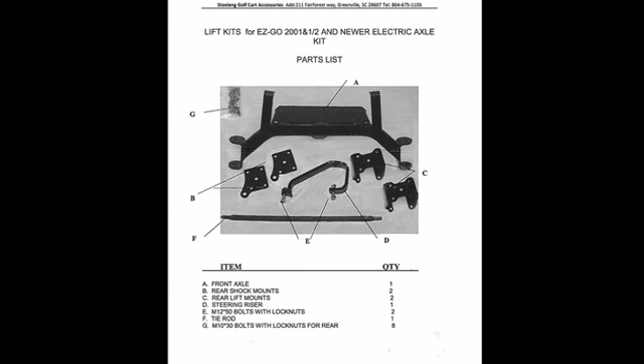Your kit will arrive all together, containing everything you need to get your cart lifted and styling around your neighborhood in no time. We recommend that you check all the components carefully according to the supplied parts list, ensuring everything is there and nothing is damaged.

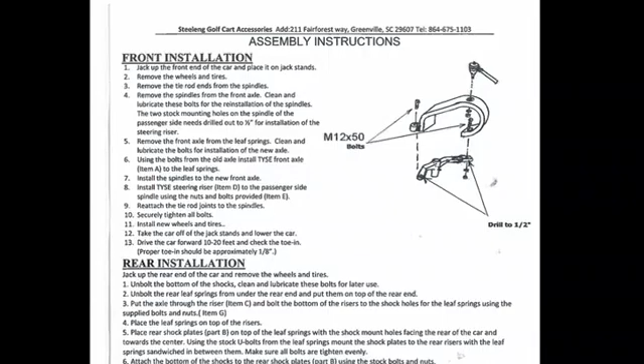You will also find assembly instructions enclosed with your new lift kit, and for most of you, I know that's all you need. But for me, I'm kind of a visual guy, and I do appreciate being able to learn from watching somebody else do it. So I'm hoping this video demonstration will assist you with your Steeleng lift kit installation.

Before we get started, I just want to remind everyone to please practice safety first. Got to have the right attitude. Wear the proper personal protective equipment, whatever that may be. Pay attention to pinch points, line of fire, and for God's sakes, protect your eyes and protect your hands.

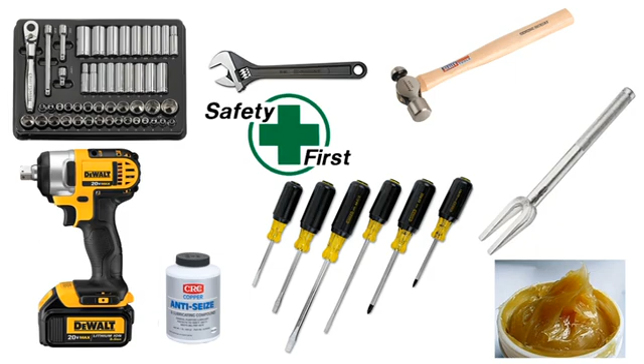You will need some basic tools for this project: a 3/8 drive socket ratchet set, a crescent wrench for backup, hammer, some screwdrivers, and a ball joint extractor which is really nice but not mandatory. You'll need some grease, anti-seize, and if you don't have anti-seize you can use the grease. An impact wrench always makes everything go faster. And remember, safety first.

Okay, let's go ahead and get started using the assembly instructions. We will first be performing the front installation.

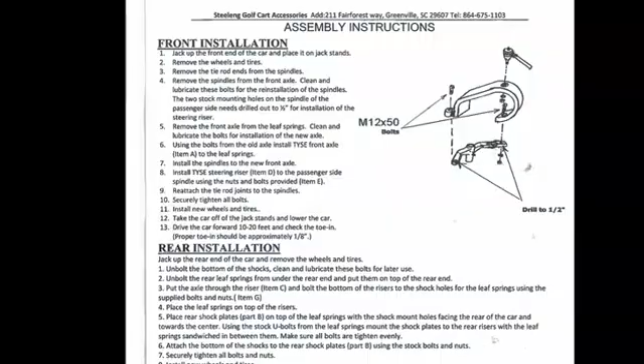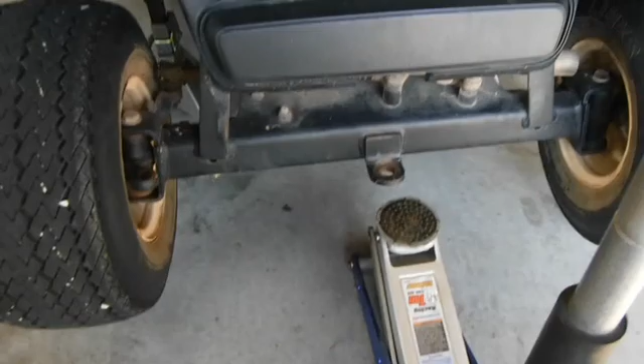One thing I didn't mention for needed tools is a way to lift your cart as well as support it. Once the cart is lifted, support it using jack stands, or your preference, on the first cross rib located just behind the front wheels.

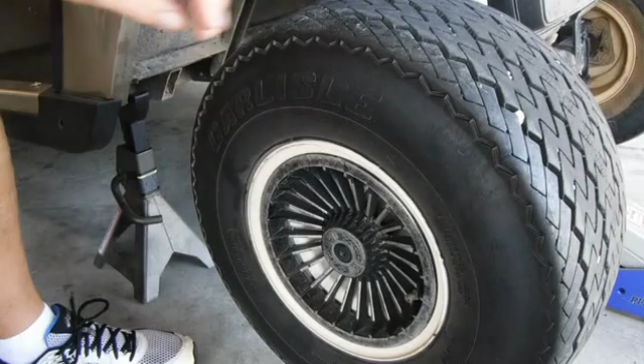Remove the wheel coverings using a flathead screwdriver, then remove both front wheels.

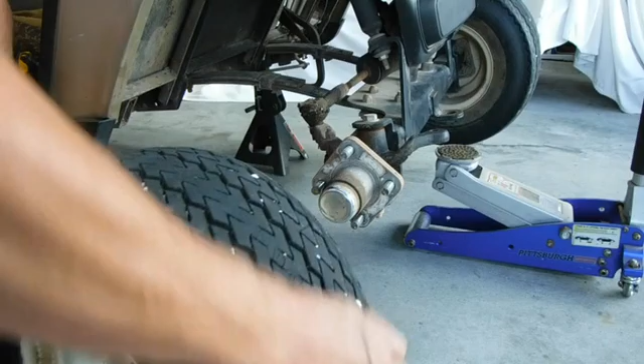Next, we're going to remove the tie rod ends from the wheel spindles. For the tie rod end and the ball joint on the driver's side, the left side of the cart, I left the ball joint attached to the spindle, which I'll explain later.

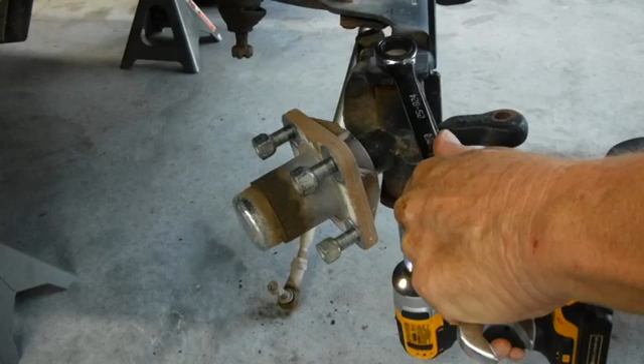Now we can remove both wheel spindles, clean and lubricate the bolts for reassembly. My cart is a 2006, and I found the front right passenger side spindle bolt to be excessively rusted and worn. Also pay close attention to the bronze base wear washer on the top of each spindle bushing, so it doesn't get set aside or lost.

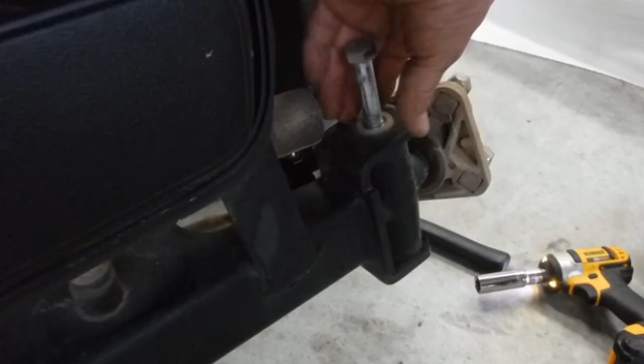I replaced both spindle bolts with 1/2-inch stainless steel bolts bought from a local hardware store, and yours may be perfectly fine and reusable, and I would encourage you to do just that if they are.

Next, remove the lower nuts and bushings from the front shocks where they attach to the front carriage.

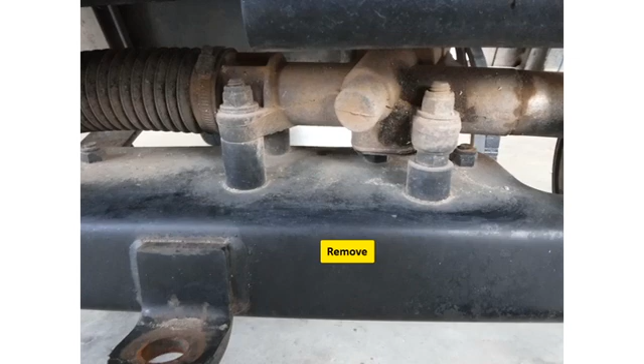Remove the 3 support bolts for the steering chamber. We're going to lay the chamber on the back of the leaf springs. The front right support bolt is also part of the front support plate for the leaf spring.

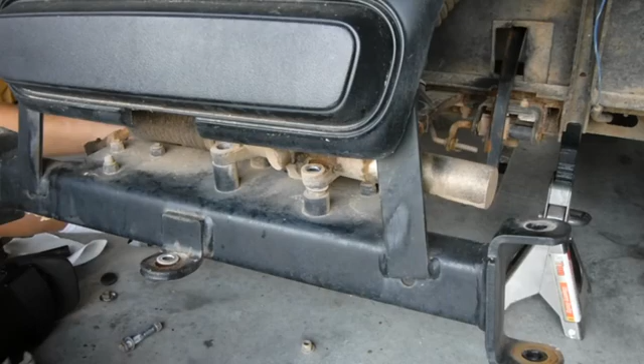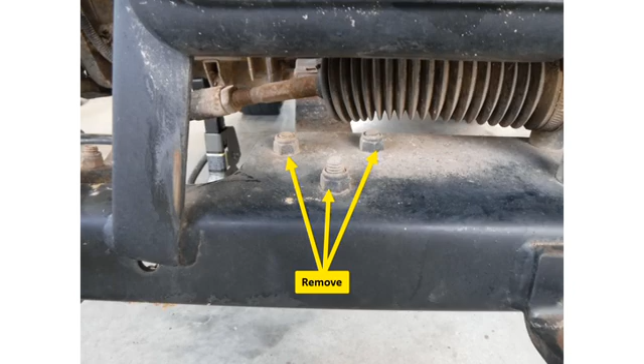Next, remove the 3 bolts holding each of the support plates securing the front leaf springs, allowing the original front carriage to be removed and set aside.

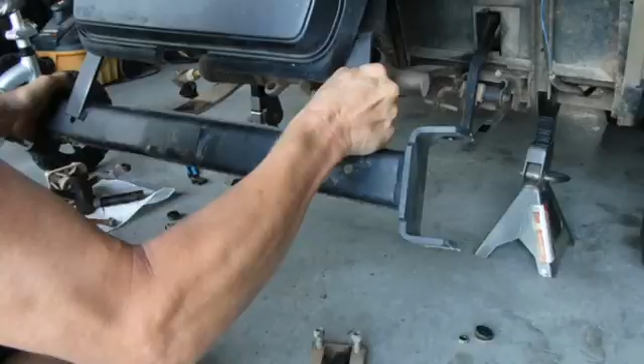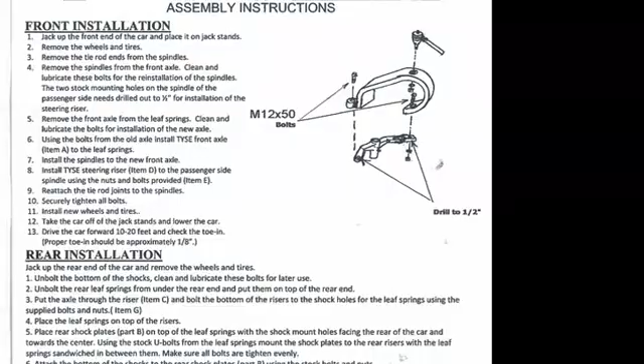The right front wheel spindle requires alterations to the original ball joint support holes. Both holes will need to be drilled out to 1/2 inch for installation of the new steering riser. The original ball joint holes are on a taper, so I would recommend drilling from the small side of the taper hole.

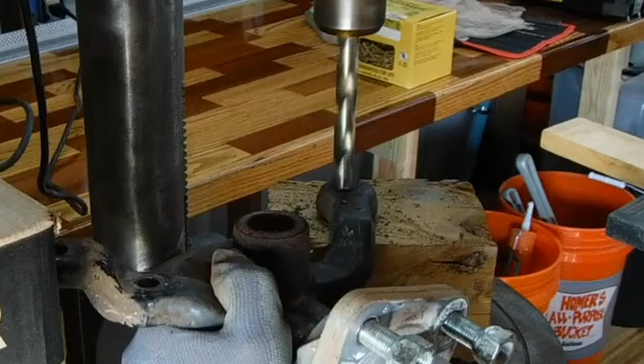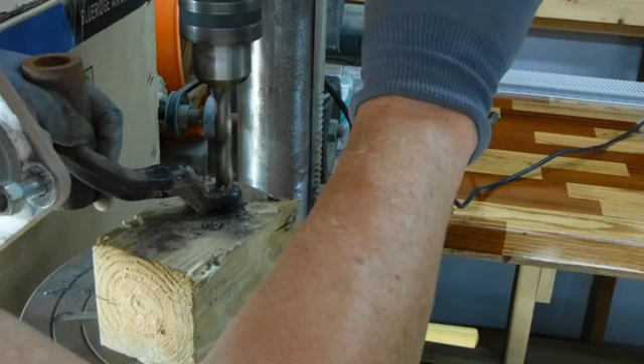Now you can see I used a drill press to perform this activity, but as long as safety is the key factor in the process, a hand drill could be used as well, as long as you have a way to securely hold it.

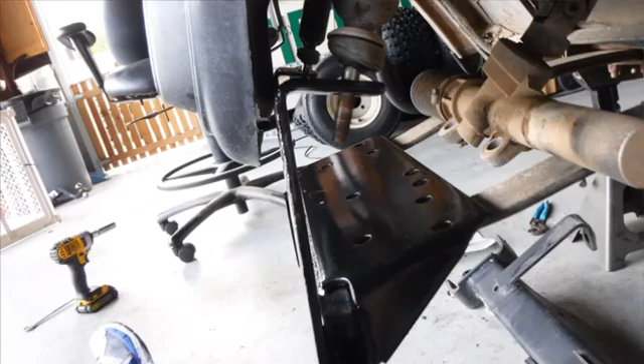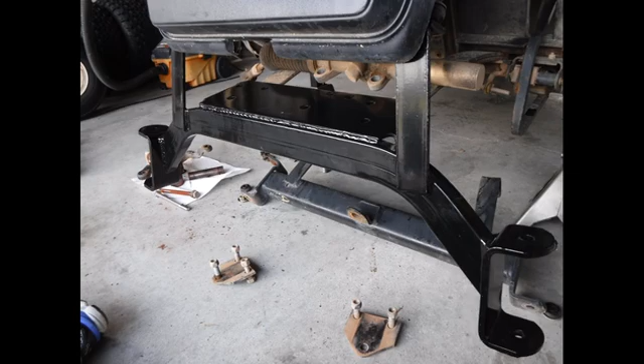Now it's assembly time for the front, and we can place what they call the new axle or carriage up on the shock stems and on top of the leaf springs. Now we're going to mount the triangular support plates underneath, securing the carriage to the front leaf springs. Remember to use anti-seize if you have some, grease if not.

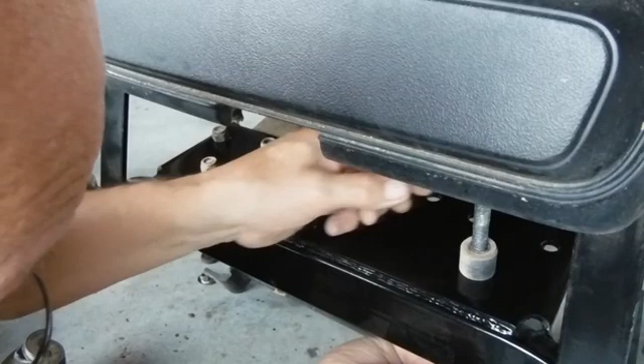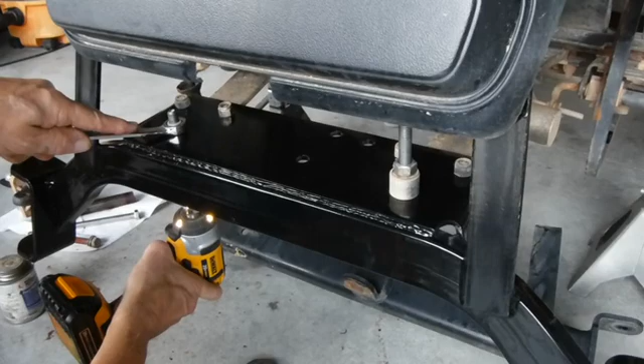Secure a bolt on each side while holding the carriage in place. All 6 bolts can now be properly tightened. Replace the nuts, washers, and bushings on the shocks and tighten accordingly.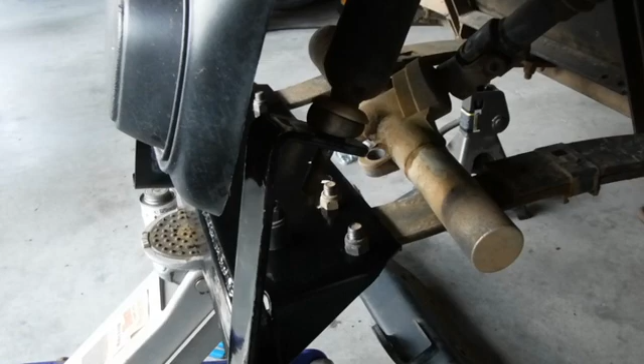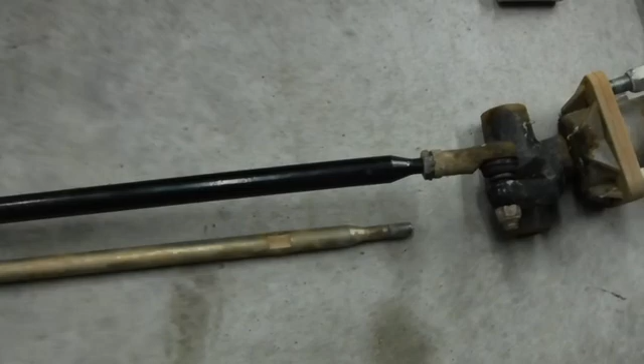Replace the steering chamber. Earlier in the video I mentioned that I did not remove the steering rod ball joint from the left driver's side spindle. Instead, I removed the old rod and replaced it with the new steering rod.

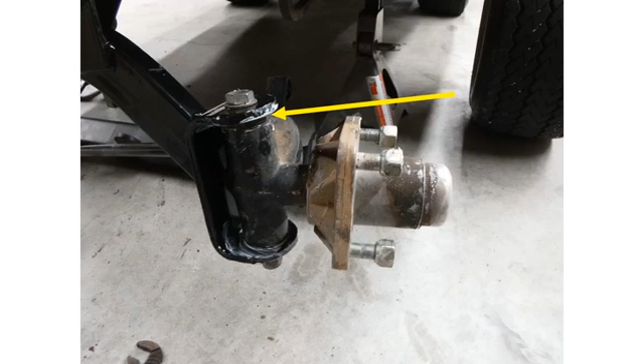We can now install the wheel spindles, tie rods, and the new steering riser for the lift kit. We'll install the steering body along with the hardened bushing. Be sure to remember the thrust washer that goes on top. Install your new 1/2 inch bolt and a new nylock nut on the bottom.

Tighten accordingly. Make sure you check that the hardened steel bushing slips freely into the steering housing, and once again, don't forget the washer.

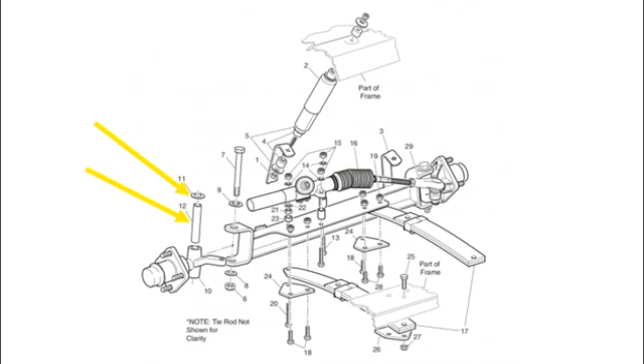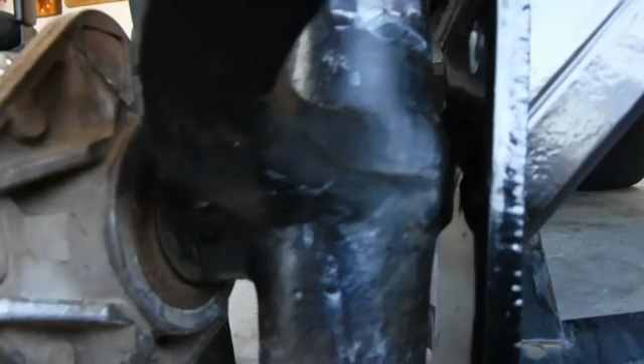The right passenger side front wheel spindle had a casting that needed to be ground down for the spindle to turn full motion. As you can see, it stops about halfway through, unlike the left one that has full motion. Once it was ground down, we had full motion on the right spindle, as it should be. It's just one of those things you need to pay close attention to as you're doing this process.

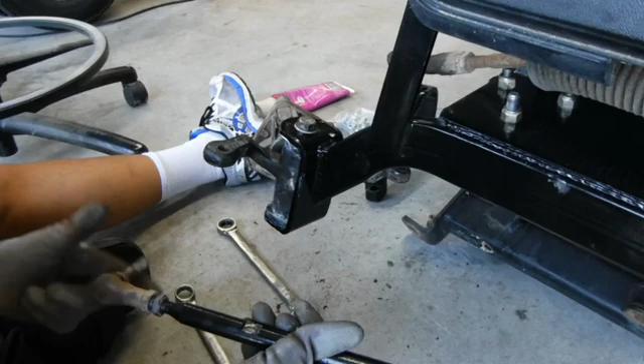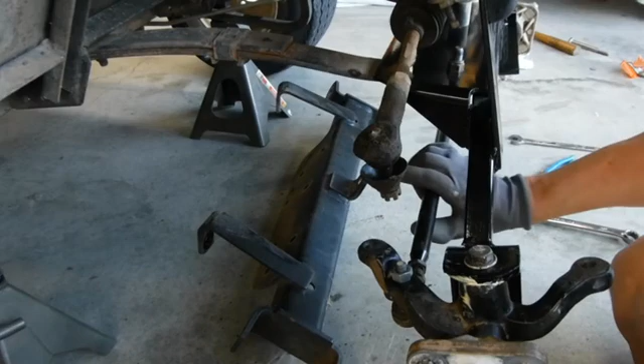Install the new steering rod ball joint for the passenger side spindle. The rod has left and right hand threads, allowing you to adjust the toe-in of the wheels, and we'll make this adjustment after we complete both the front and back assembly.

Now we're going to install the new steering riser, and lastly, the main steering cylinder ball joint.

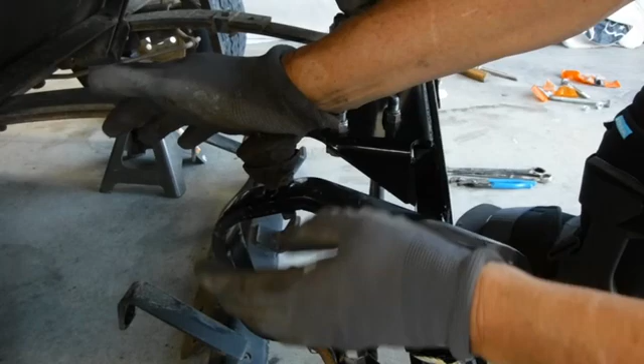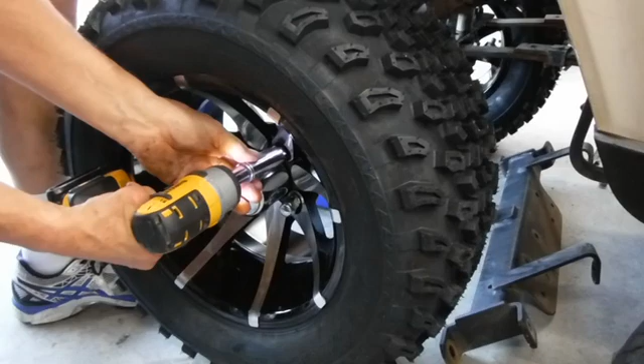Okay, let's install these fancy new wheels on the front of this thing. Now the center hub cap basically just slides in and you mount your wheel and install your lug nuts. I ran mine up with an impact wrench, but I actually torqued my lug nuts to 110 foot-pounds. It's not mandatory, but recommended.

Now that we're almost complete with the front assembly, let's get started on the rear. I performed this task solo, but would highly recommend, for safety's sake, having support. I would encourage anyone performing this activity to recruit some assistance, just due to the nature of the disassembly and assembly process.

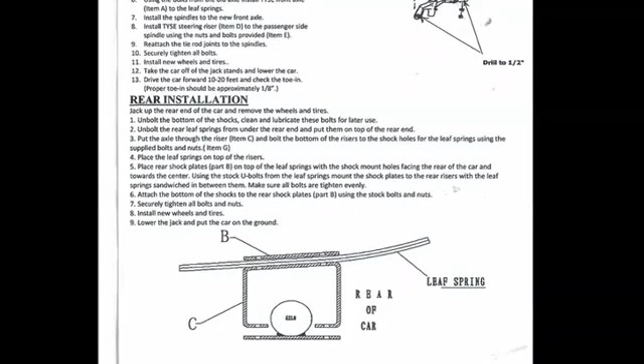Understanding that the axle moving from the top of the leaf spring to the bottom of the leaf springs can result in a challenging assignment for one person. Now, that being said, let's get started.

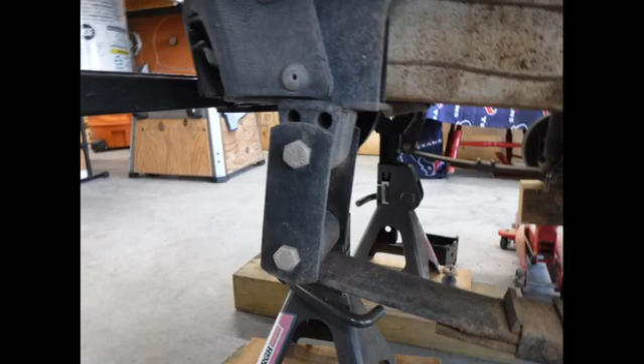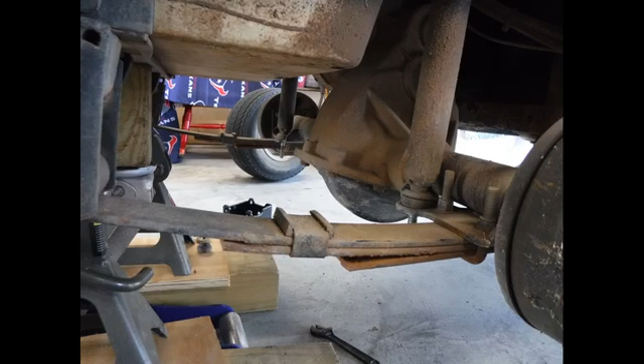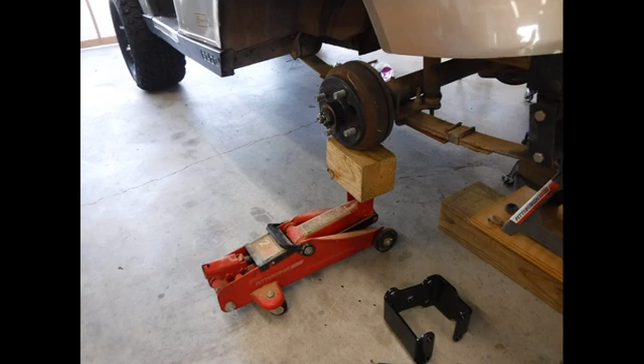We're going to jack up and raise the rear portion of the cart, placing jack stands or your choice of support on the cross plate just on the inside of the rear leaf spring supports. Remove both rear wheels, place jacks, or once again your choice of support, underneath each side of the rear axle at the brake drum area to lower or raise as needed during disassembly and assembly.

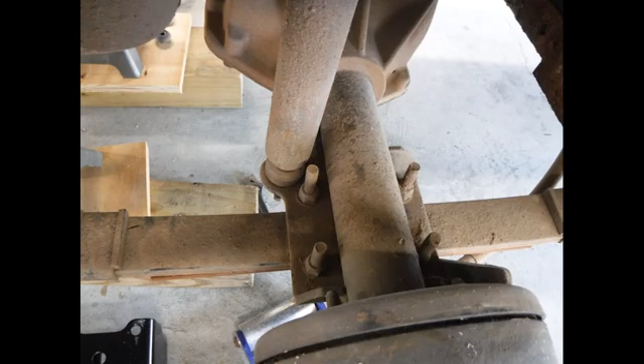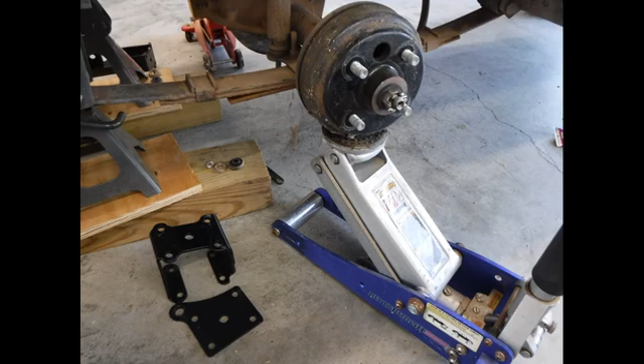Then we're going to remove the lower support from both of the rear shocks, cleaning and lubricating for later assembly, followed by the removal of the shock and axle retaining plate, which is on top of the spring there, from each side of the cart. Now, understanding that the rear axle is resting on the leaf springs, supporting the rear axle as we talked about on each side, you can now remove both of the rear leaf springs.

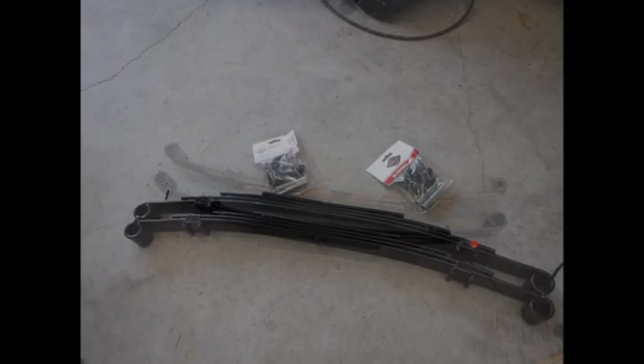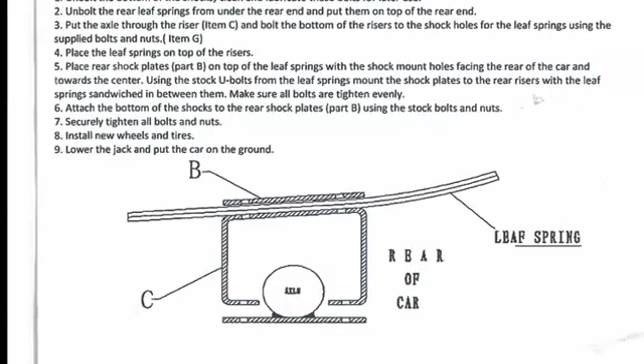As you viewed in this video, the original rear leaf springs are worn and weak, so I chose to replace them with a newer heavy-duty rear leaf spring assembly that can be purchased at pretty much any golf cart supply or online. Now we can put the new rear riser kit parts in place along with the new springs. Everything will be just in reverse of the disassembly, with the exception of the relationship with the axle being underneath the leaf spring instead of on top, as seen in the instructions.

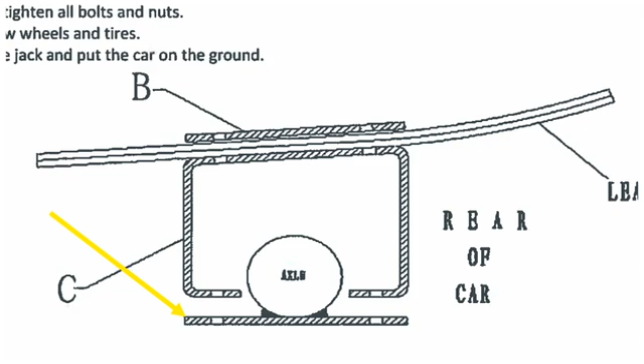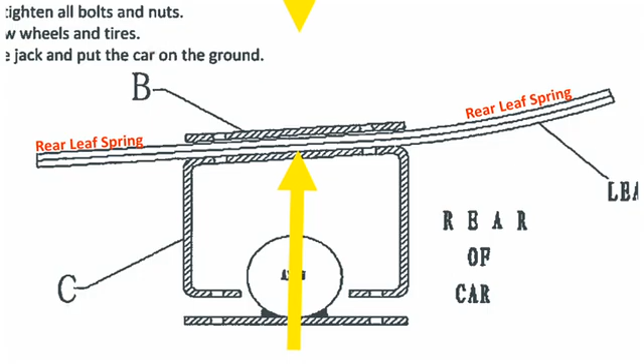Once you raise your axle into place, you will be using the new shock support plate also supplied in your kit. Use your jacks on each side, raise the axle up to the leaf springs using the alignment centering holes on the new riser and the alignment centering pin on the leaf springs. Place the new shock support plate on top of the leaf springs, once again using the alignment pin and hole as shown in this demonstration.

Secure the assembly using the original U-bolts. You should now wind up with something like this. You can install your new rear tires and wheels, remove your jacks, and set this sucker on the ground.

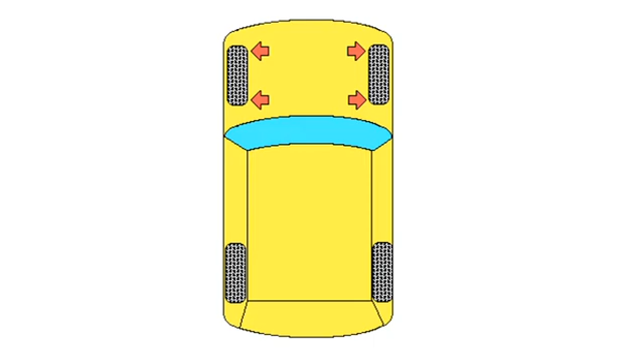Remember me saying we'd be coming back to the new front tie rod adjustment? Well, it's time to adjust the toe-in on the front wheels and adjust your steering wheel back to center. The tie rod has right-hand threads on one side and left-hand threads on the other, allowing you to open or close the gap by simply rotating the rod in one direction or the other. The instructions suggest that you drive the cart forward 10 to 20 feet.

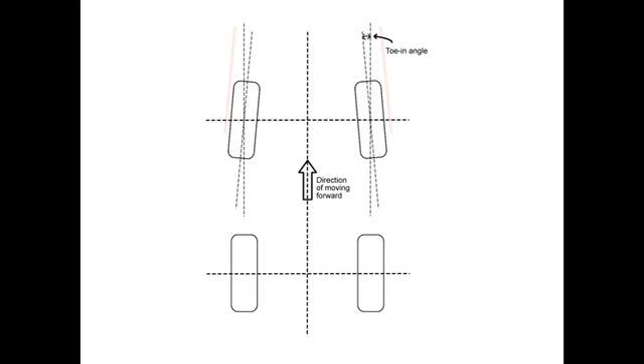However, I chose not to perform this activity. Instead, I achieved the same results leaving the cart in place, using a straight edge of your choice on each side, getting it as near to the forward motion as possible. Then placing straight edges on each side of the front wheels, using some help if available, setting the toe-in to the preferred 1/8 of an inch. Once you have the proper toe-in, tighten or set the lock nuts on each ball joint.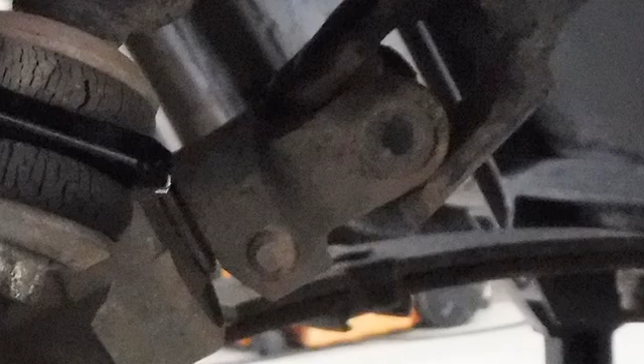After you're done setting the toe-in, you will probably in most cases find your steering wheel off center, and this is an easy adjustment. Remove the steering rod coupling from the steering chamber by loosening and removing the clamping bolt. You will find this to be a spline coupling that you can simply rotate and turn to a new location. With your front wheels in the forward position, rotate the steering wheel to the centered position and reinstall the steering rod coupling to the steering chamber, replacing the lock bolt, and tighten.

You're all done, ready to roll.